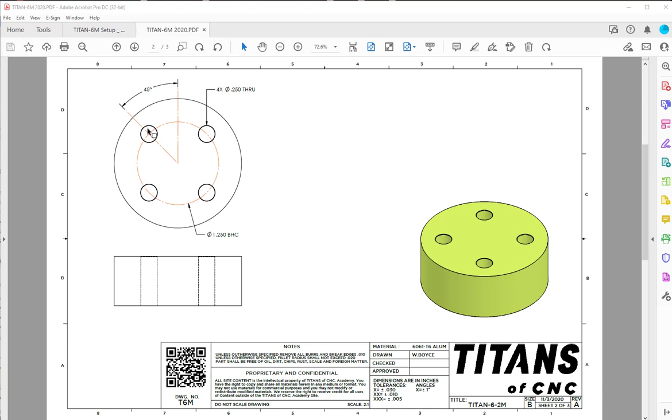Review the part drawings and think about the features you need to create. Rename Level 1 to WF for wireframe. Create a circle using the origin as the center point. Set the diameter 1.95.

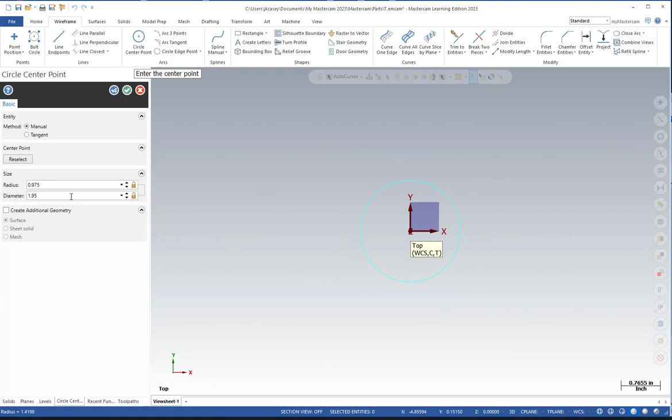Next, add the 0.25 diameter holes with the Bolt Circle tool. Use the drawing to help set the parameters.

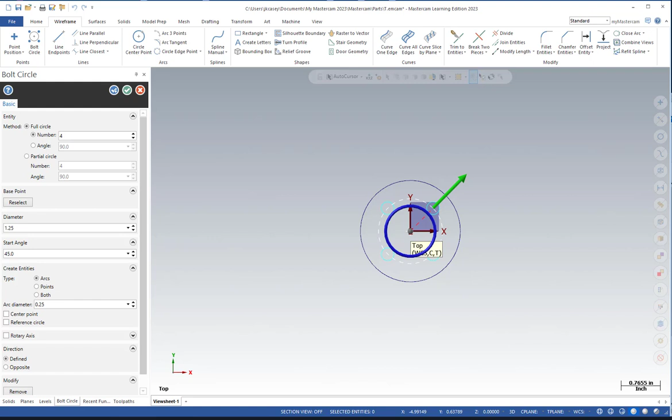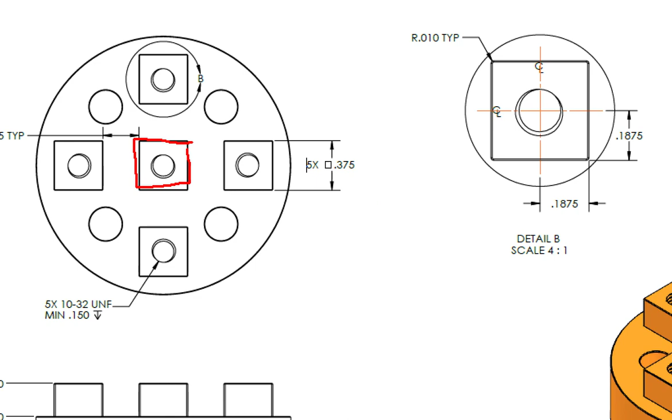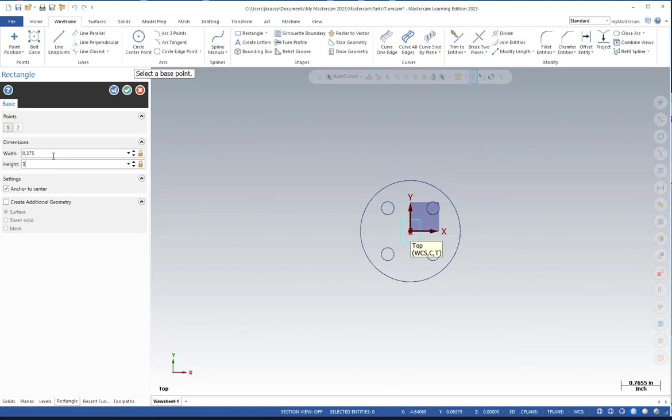Next, add a rectangle anchored by the center at the origin. Set the width and height to 0.375. Use Translate to make copies of the square.

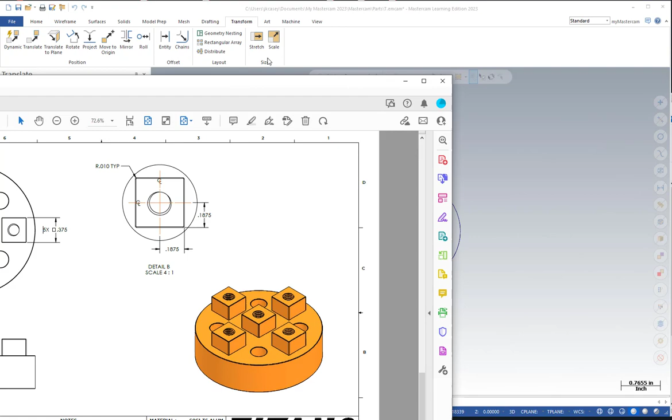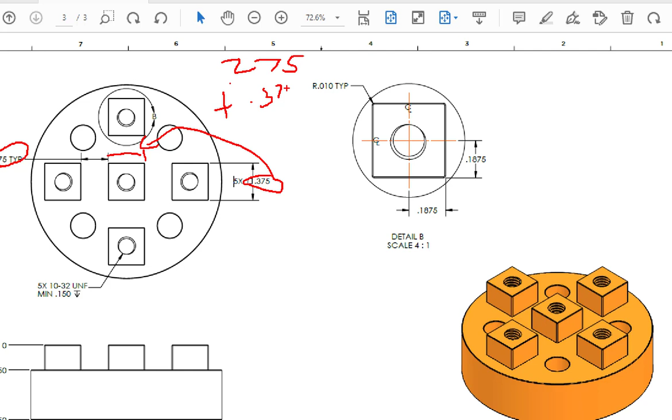Calculate the spacing between them. Use the both sides option in the directions. Use the check plus to repeat the same process in the Y direction.

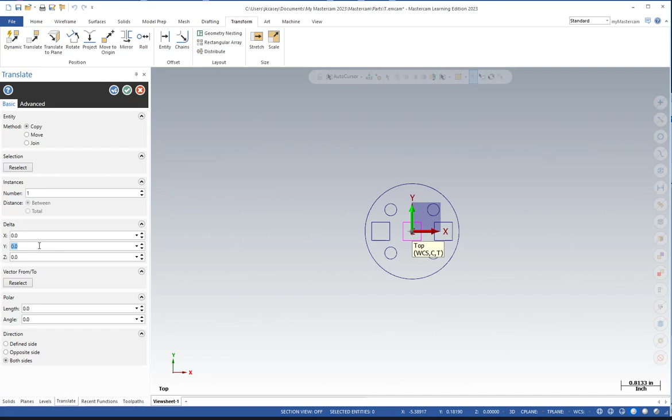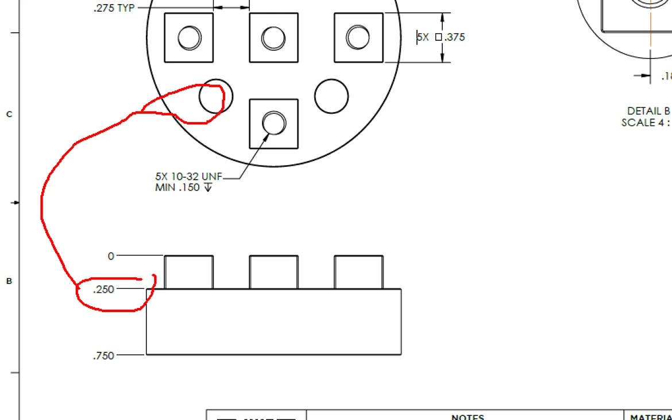Next, we can adjust the z-values of the circles. Select the circles and right mouse button, pick Analyze Entity. Adjust Z to -0.25. Use the arrows at the top to repeat.

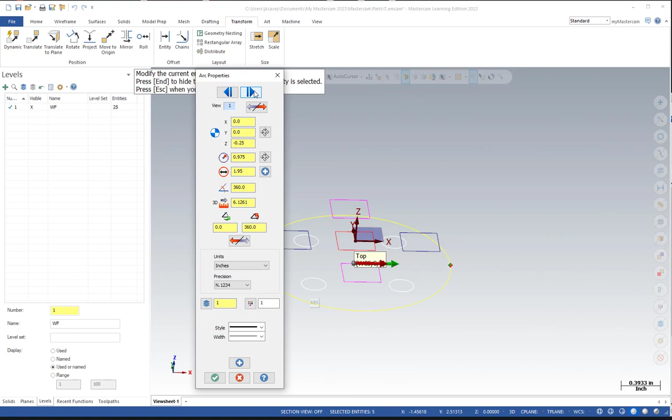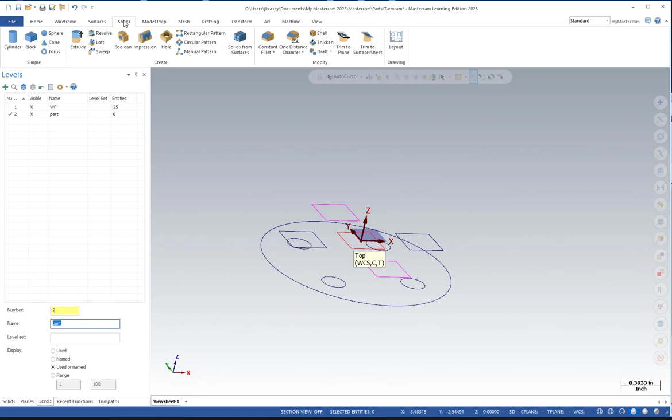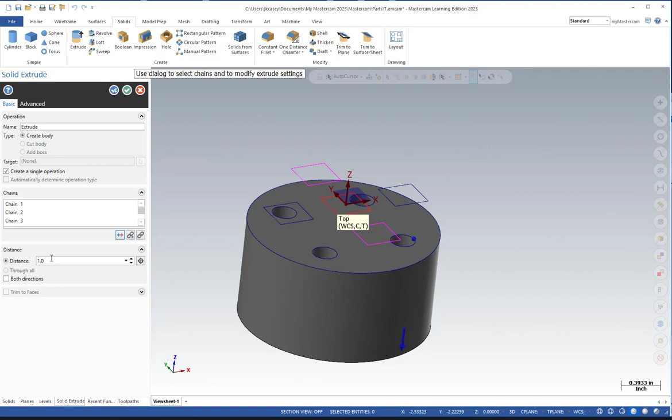Now you can extrude the circles downward 0.5. I'll use a layer for my part. Use the check plus and repeat, extruding the squares down as bosses.

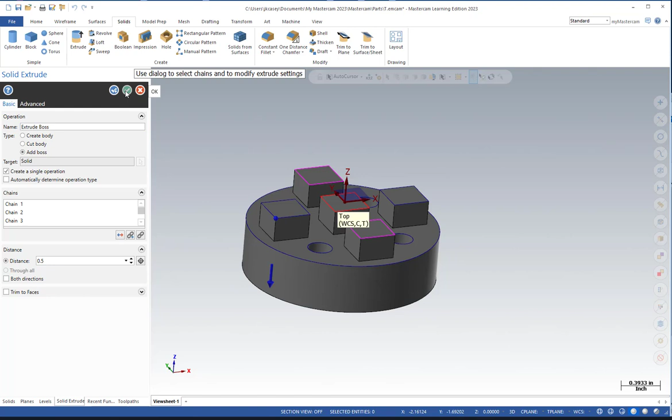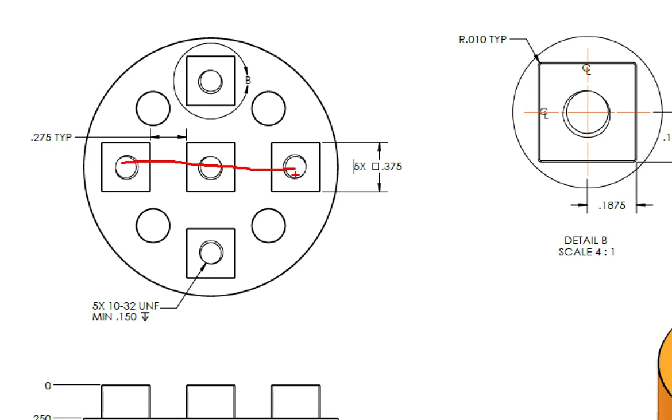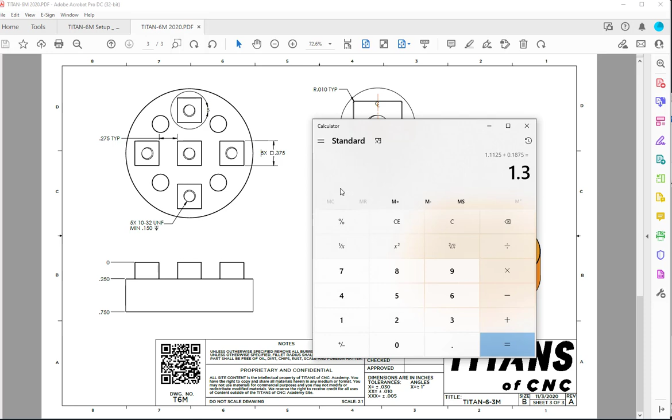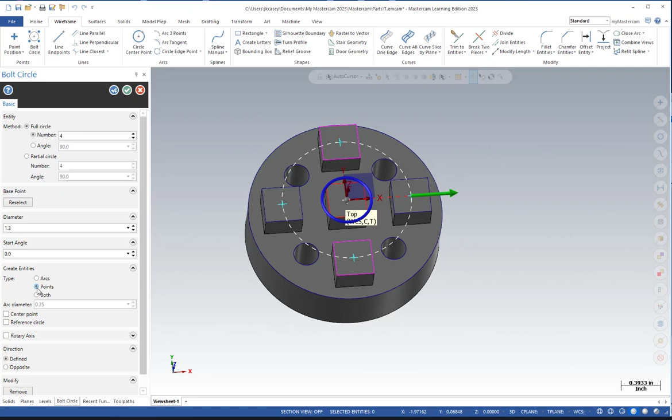I'll use the bolt circle again to place the threaded holes. Calculate the diameter between them. The pattern starts at the origin and the diameter is 1.3. In this case, just add points.

Launch the hole tool. Use the auto cursor position to add the hole in the center, x0, y0. Use the arrow tool to pick the other points. Press Enter.

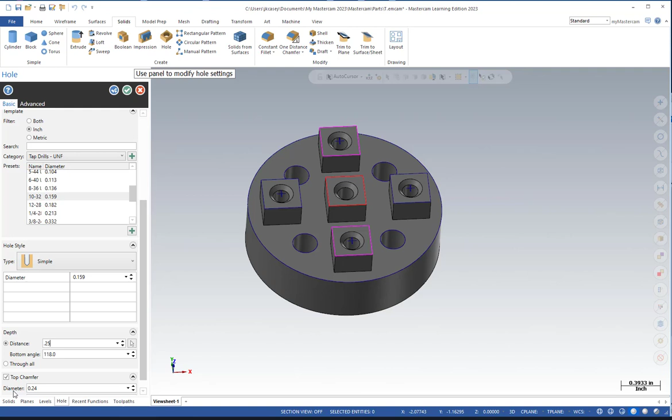Adjust the hole template to UNF and size to 10-32. Set the depth to 0.25 and turn off the chamfer. I'll make sure all my wireframe items are on the WF level. Set WF current and select all wireframe. Right mouse button and use the change level tool.

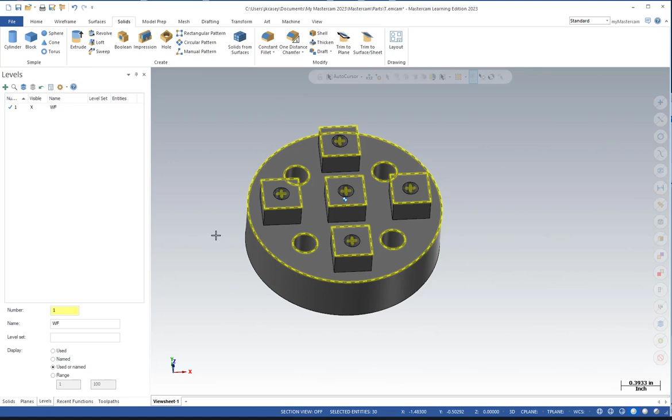At this point, I think the model is finished. I have forgotten the fillets and chamfers. I'll fix it later. I'll make a new stock level and set it current. From the machine ribbon, add the default mill. Expand the properties and pick stock setup.

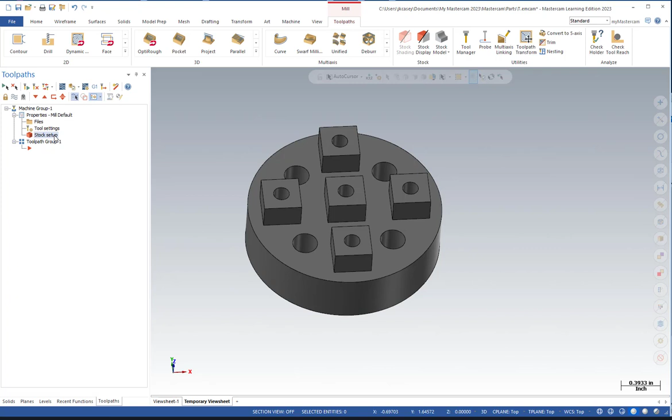Pick the bounding box icon, then use the manual arrow. Control A to select all. Confirm the origin is at the top center and enter X equals 2.05, Y equals 2, and Z 0.98.

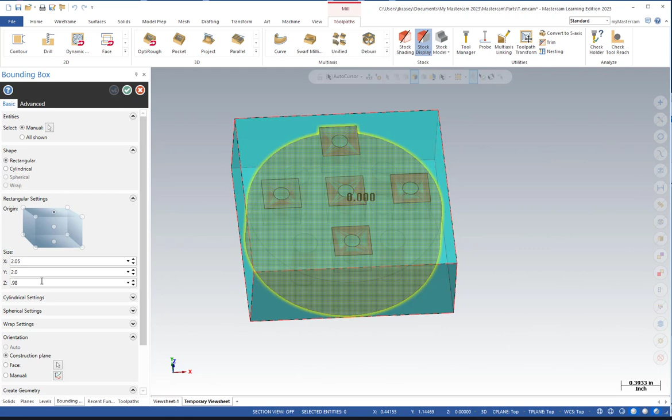Change the origin to the bottom center and adjust Z to 1. I want lines and solids on. Pick the check, confirm the shown measurements, and pick the check again to finish.

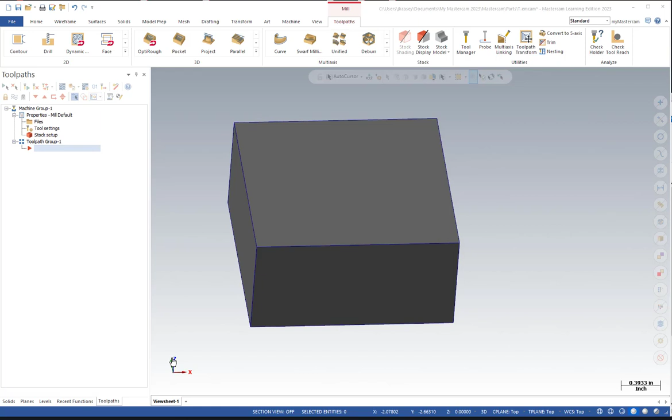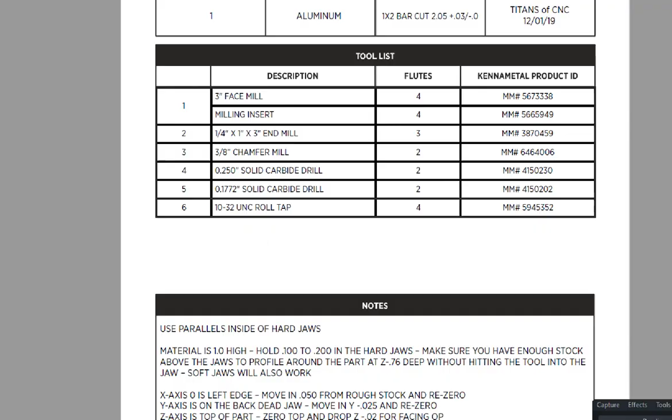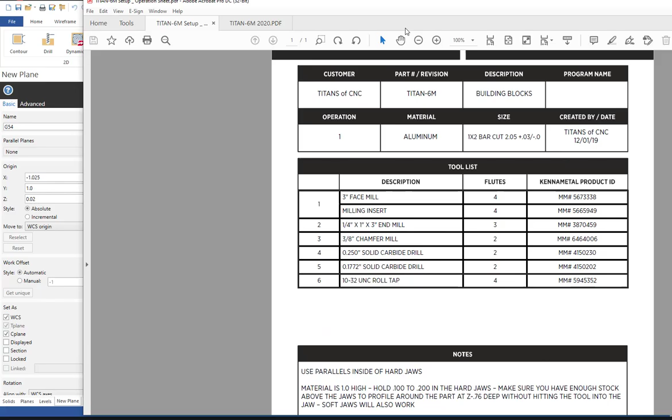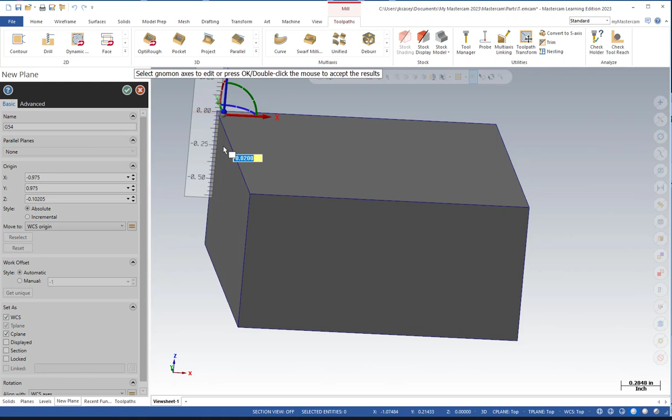Drag the planes icon to the corner of your stock solid. Adjust the X, Y, Z values based on the setup sheet. I've noticed with this version the Z is always a little wonky. I always confirm and adjust it. It should be 0.02.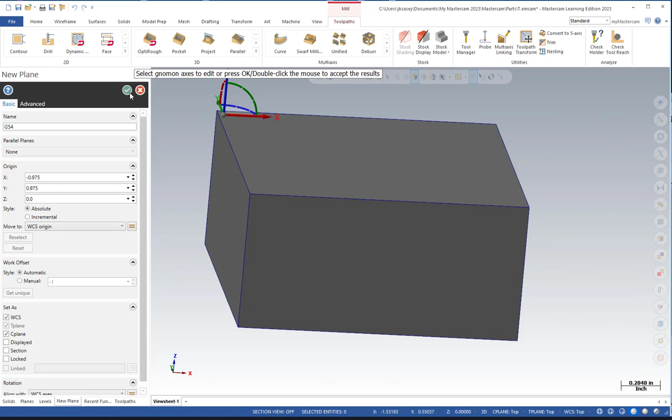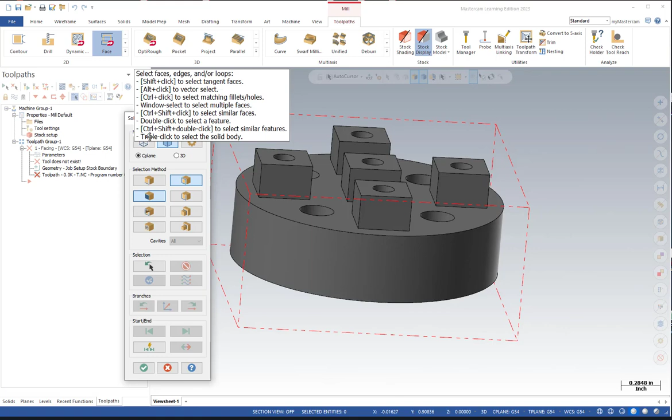I will turn off the stock model and start my facing operation. You should not pick any geometry when facing. Just pick the check mark to advance. Load your tool library and select the 3-inch face mill. Set the speeds and feeds.

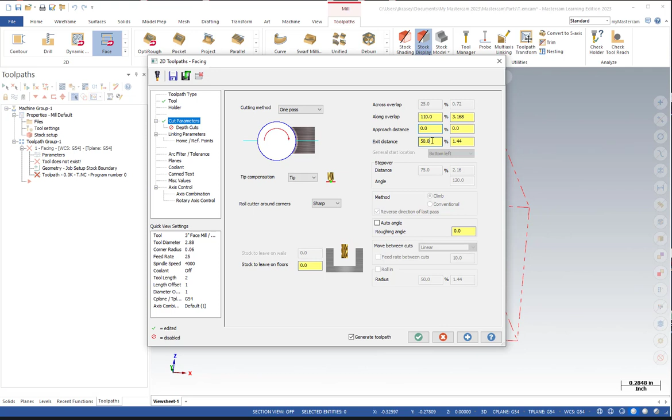Adjust your cut parameters. Confirm the linking parameters are all absolute, and double check the planes. Make sure the depth is 0. Double check the planes and turn flood coolant on.

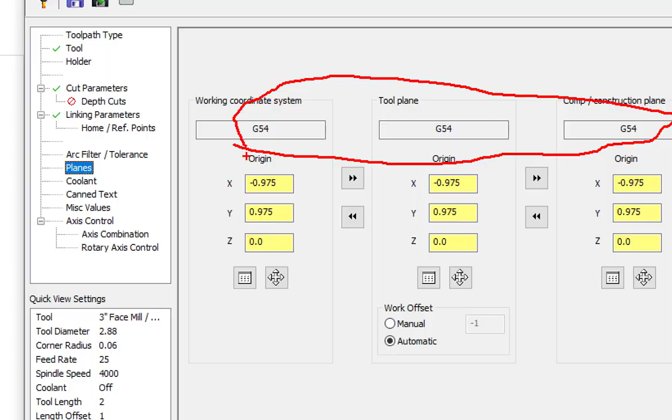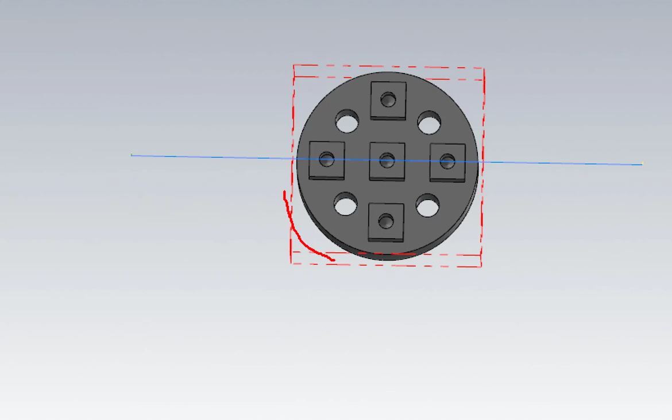To remove the material around the outside, I will use contour. I'll select the bottom edge of the part. Use the 1/2 inch flat end mill. Set the speed and feed rate.

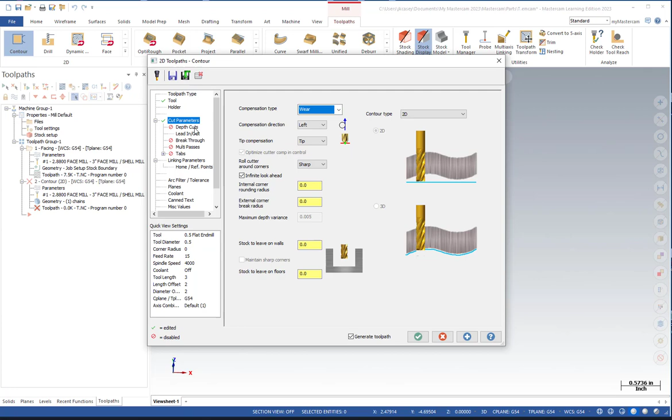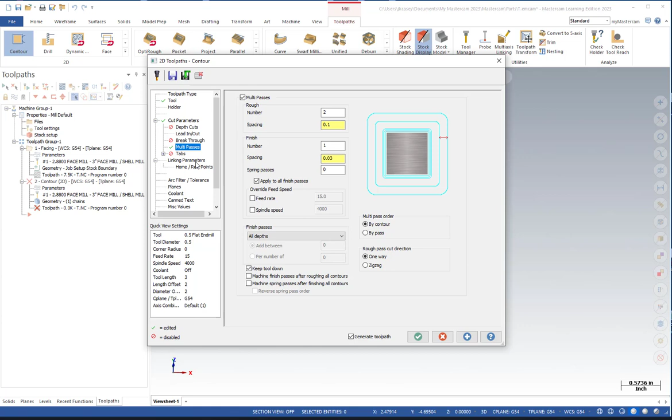Adjust the cut parameters. Turn on multi-passes and set the spacing to 0.1. Add a finish pass of 0.03. Set the linking values to absolute. Adjust the depth to -0.8. Confirm the planes and flood coolant is on.

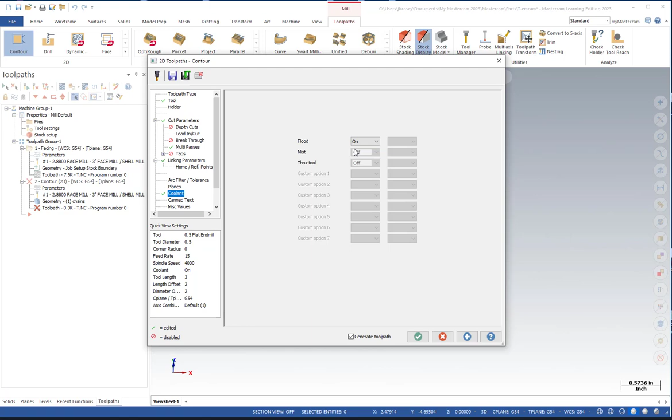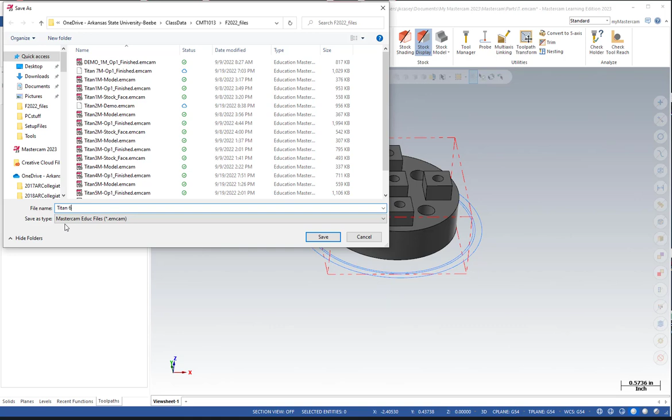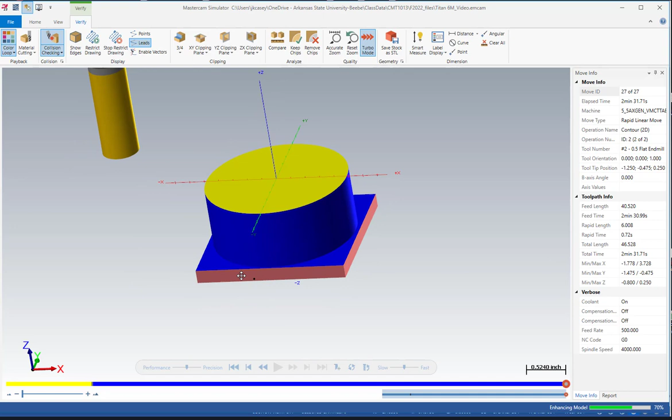Now is a good time to save and verify. Here's when I noticed that I forgot the fillets and chamfers. I'll add them now.

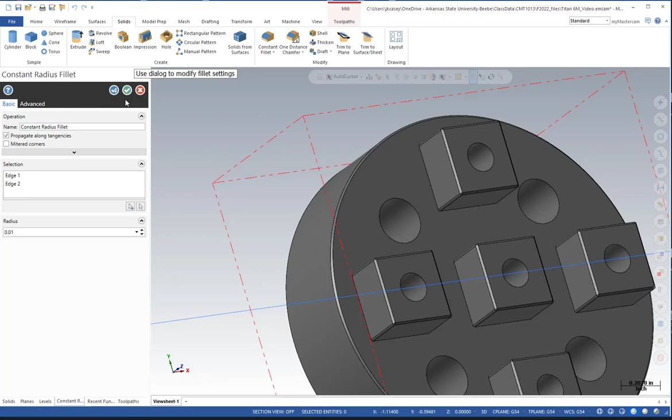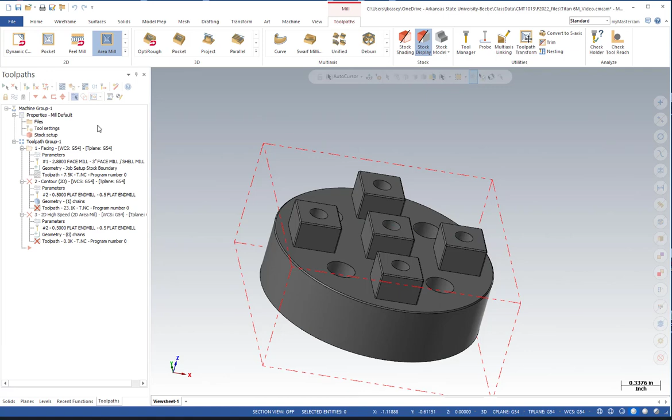To remove the material around the squares, I'll use the area mill. I frequently use this operation. For machining area, pick the outside edge of the chamfer. For avoidance area, pick all the way around the bottom edge of each square.

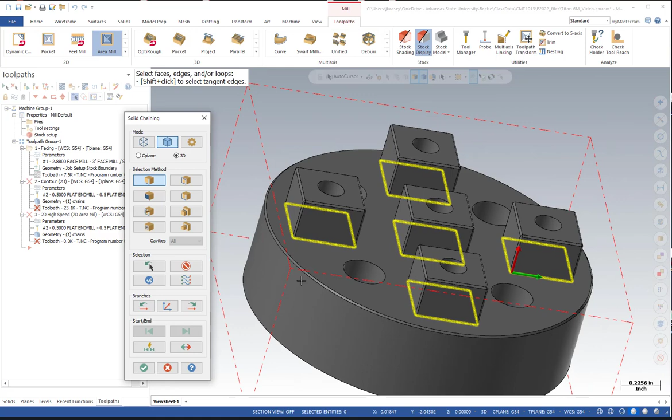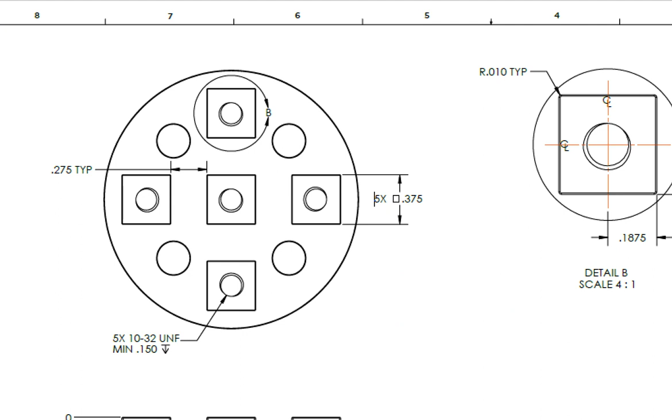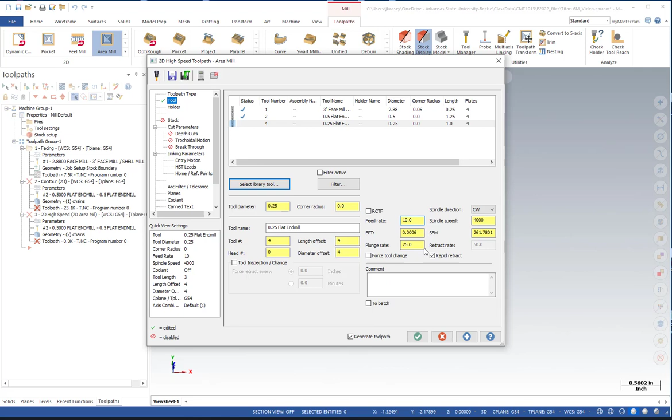You can preview the operation. In this case, there's no need to stay inside, so switch to from outside. Use a 1/4 inch flat end mill in order to fit in between the squares. Set the speed and feed rate. Adjust the cutting parameters and depth of cuts. This is a small tool, so we should make smaller cuts.

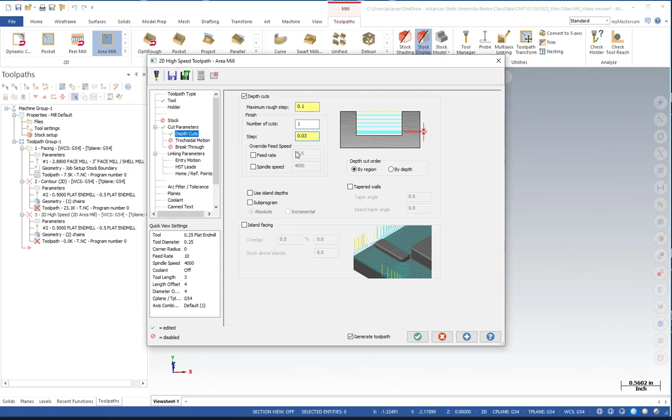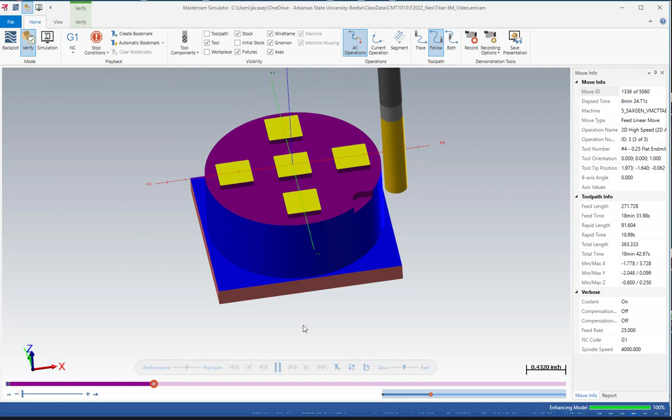Set linking values to absolute and use the depth button to select an endpoint at the bottom of a square. Confirm the planes and coolant. Save your changes and run the Verify tool. Next, use the drill operation to drill the 1/4 inch holes.

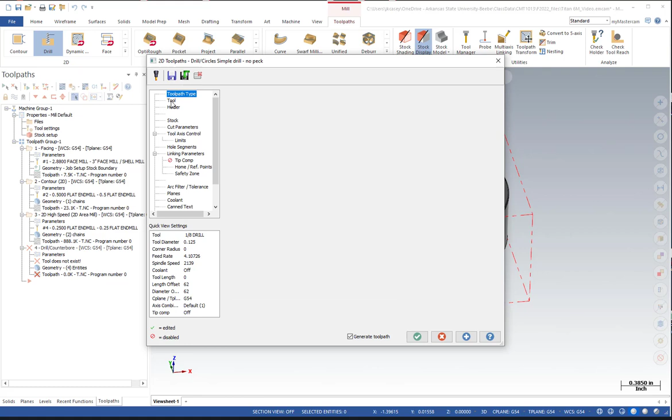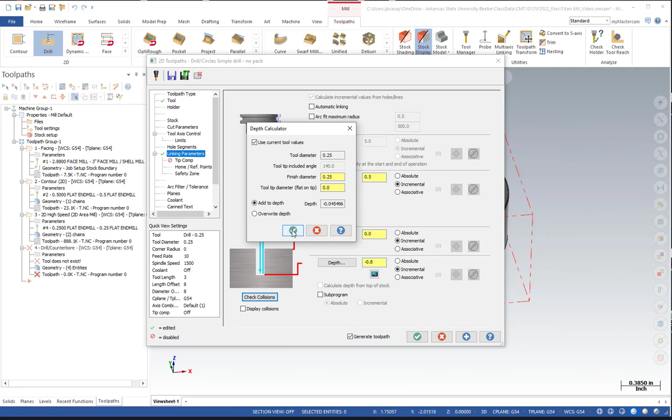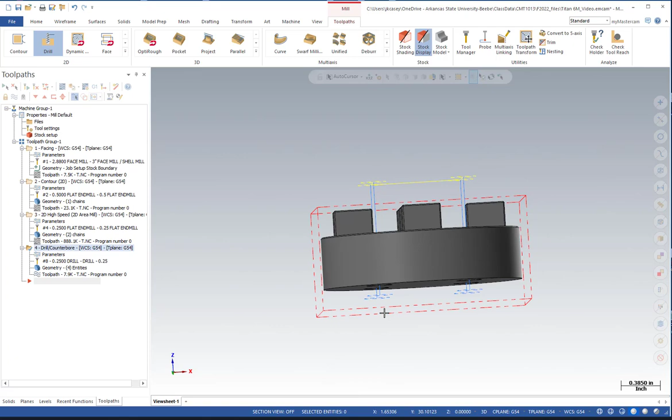I forgot to set the cutting parameters. Set linking parameters to absolute and use the calculator to calculate the final depth to drill through. Confirm the planes and flood coolant is on. Repeat the drill operation using the 0.177 diameter drill for the threaded holes.

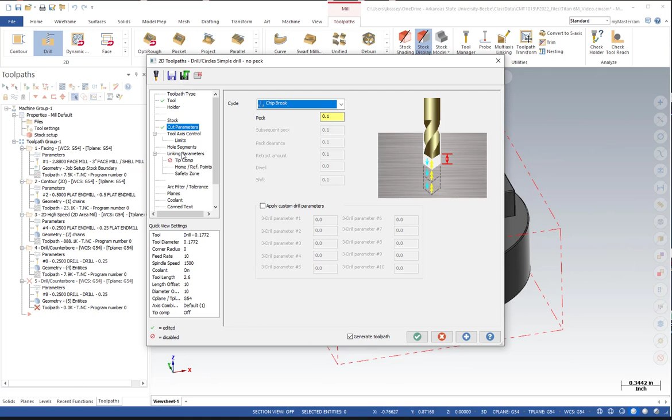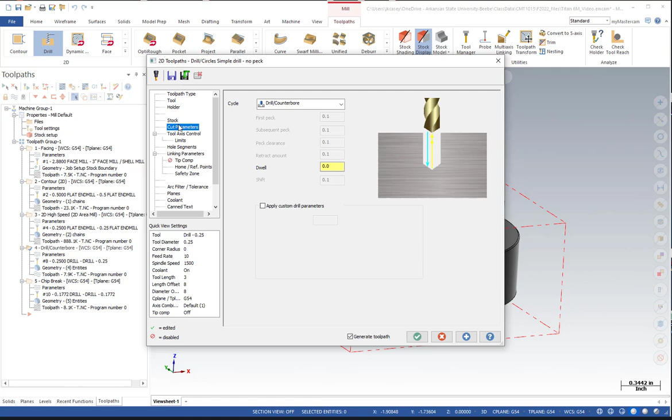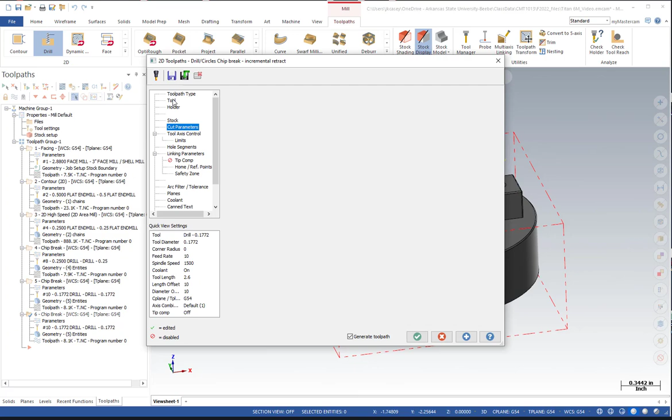Set the cut parameter to chip break. Linking parameters to absolute and the depth to minus 0.25 plus the 0 point. Now I'll quickly fix the previous drill operation, making it a chip break. I can copy paste the last drill operation and adjust the parameters to use the 10-32 tap tool. Cutting parameters to tap and adjust the depth.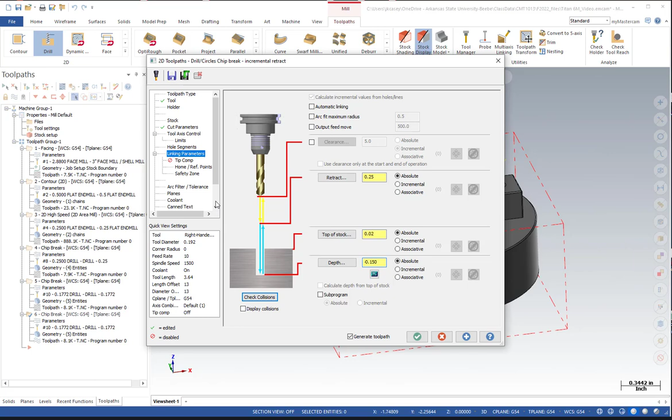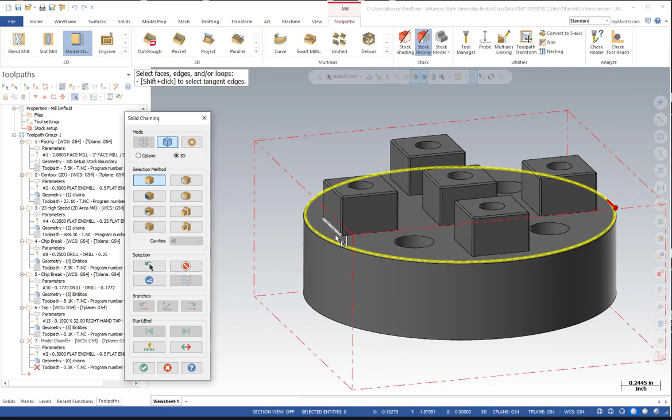The final step is to add the chamfers. Use the model chamfer operation. Use the Select Chain Geometry button and select the top edge of the chamfer around the cylinder and the top of each square. Do note the arrow directions.

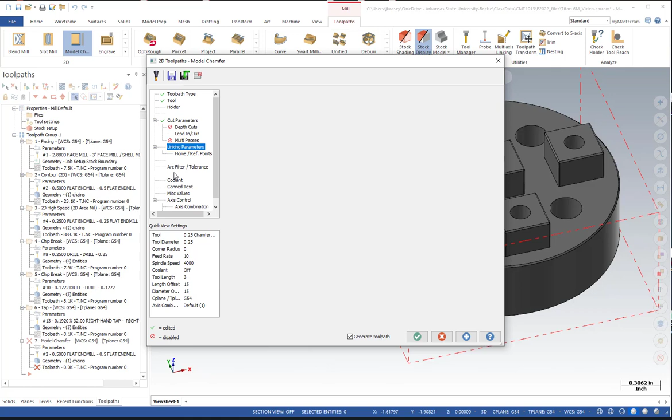Confirm you can see a toolpath. If not, you may need to reverse the chain. Save your part and run the verify to confirm all the operations. I like to show my wireframe and compare it to the verify model.